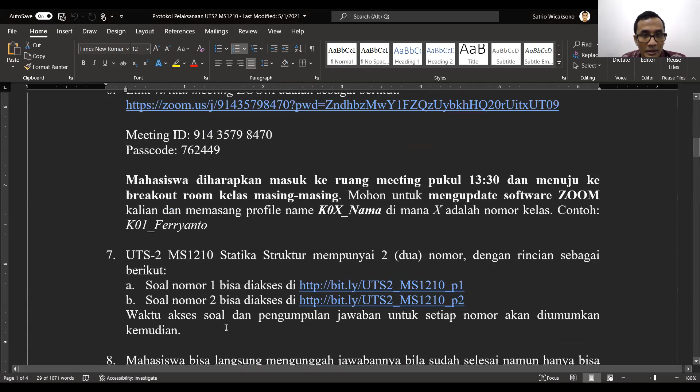Then the answer submission can be using MS Form or normally a Google Form. You are not allowed to leave your table while doing the exam. You are not allowed to use your cell phone or Excel as your calculator, so you have to bring your own calculator. You have to be on cam all the time. This is the Zoom meeting for the previous exam; it will be slightly different for this particular exam.

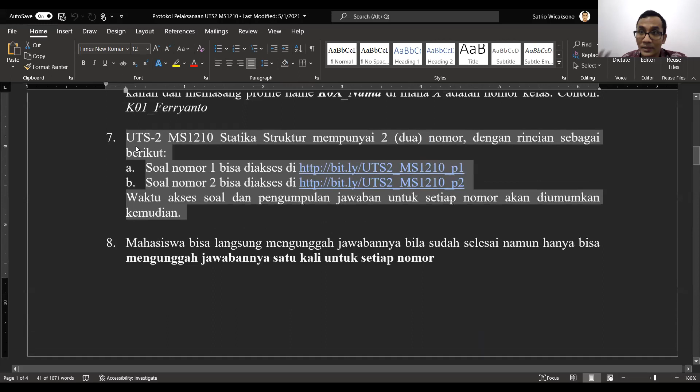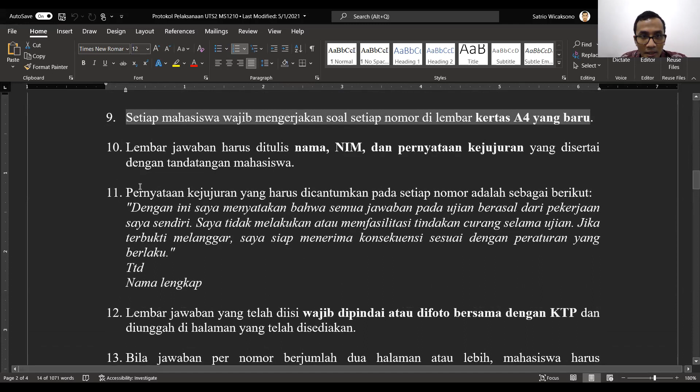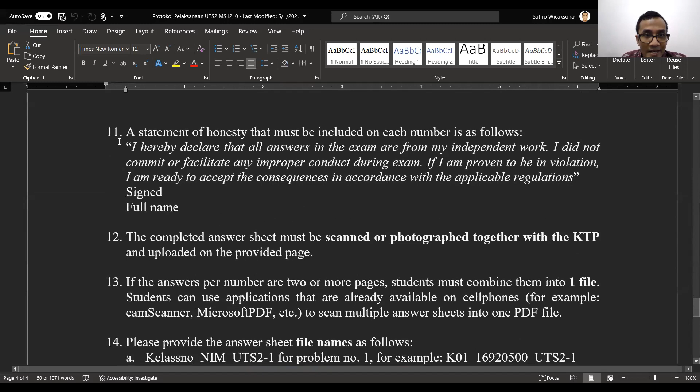You can only access the problem at the time of the exam. You have to use a new A4 paper, writing your name, your student ID number, and this one in Bahasa. But for those who prefer English, we have the procedure in Bahasa and in English, so you don't have to worry. Statement of honesty, you have to write like this. Also provide your ID, either your national ID or your student ID.

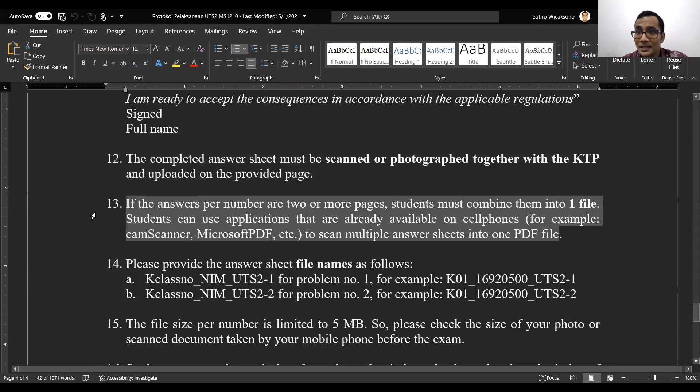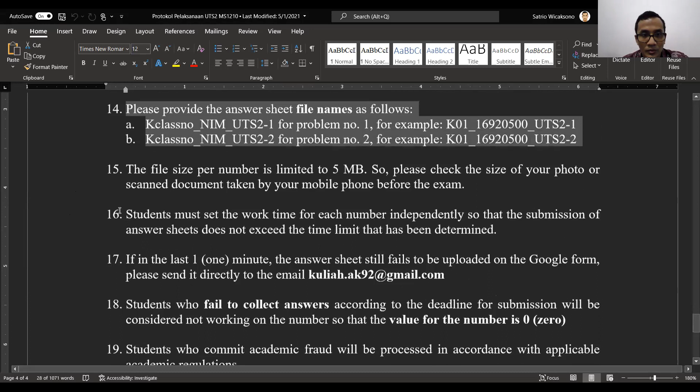This is how you're supposed to submit the answer. Most likely this guidance, this protocol, will be sent to you at least 2 hours before the exam so you can study it first. This is the naming of the file, so you have to name your file properly. There is a limit on the file size.

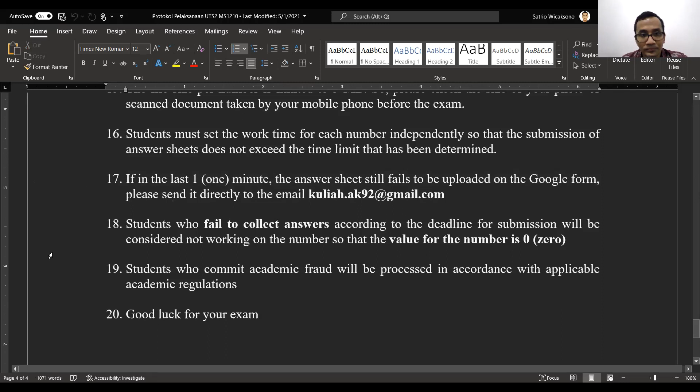If there is a problem when you upload your work, you don't have to worry; try to email directly to this. I'm not sure whether it will be the same for this particular exam, but we will provide an email for emergencies when you fail to upload to Google Form or MS Form. That is the protocol. There is a camera requirement, so it's better for you to prepare for it.

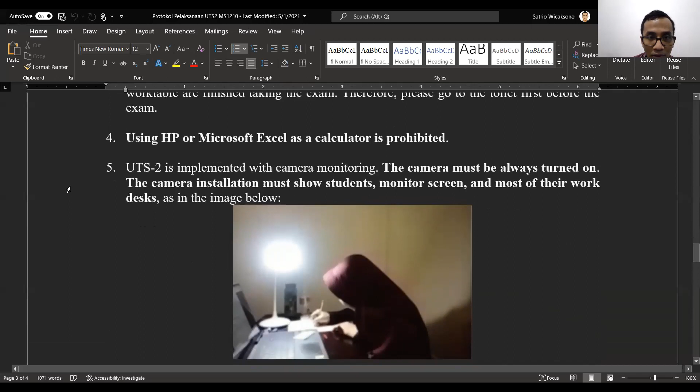Most of the time, you can use your laptop and your own cell phone camera. Use your cell phone camera so that the whole table is shown like this. Any other question about the exam?

I believe it's clear enough, right?

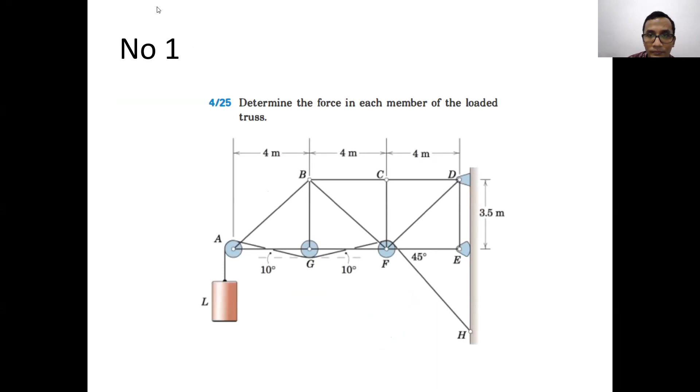But first, I want to check with you guys. Is there any problem with our homework? The latest homework. Number 1, number 2, number 3, number 4. Any one of you having a problem with your homework? Sir, I'd like to ask about number 3. Number 3. Okay, yep. So for points A and B, there are no reaction joints, right, sir? I just want to clarify.

Well, what do you mean by reaction joint? So there's no Bx or By and Ay and Ax, only 1.6 kilonewton each. So yes, correct. So basically at A and B, in this case, you can just simplify the problem into like this. So basically this is the simplification. The simplified case, actually, you can make it like this.

So basically at A and at B, you can just simplify it by giving a downward force of 1.6 kilonewton each. So like this, 1.6 kilonewton, 1.6 kilonewton. At G and at E, yes, of course, because it's a pin joint there will be Gx and Gy. And this one, there will be Ex and Ey, like that.

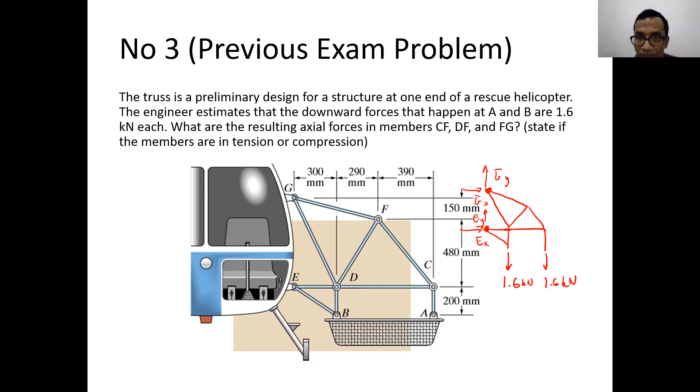The ones in question are CF, DF, and FG. This one. Okay. Basically, you can just use the joint method, or you can use the section method. But for this one, I believe the joint method will be much easier. Okay, because this one is a two-force member, right?

So basically, at C there will be 1.6 kilonewton. The member AC will be just under tension only because it's a two-force member, right? So I can just eliminate this and replace it with 1.6 kilonewton here. Because member AC is actually a two-force member, and we know the value of the force, 1.6 kilonewton. Okay, so basically this is the problem, and you can start solving it from joint C here.

After solving joint C, you can solve this and this. Okay, then after that you can solve joint F to solve for this and this. That's simple. Okay, Rafi? Okay, thank you, sir.

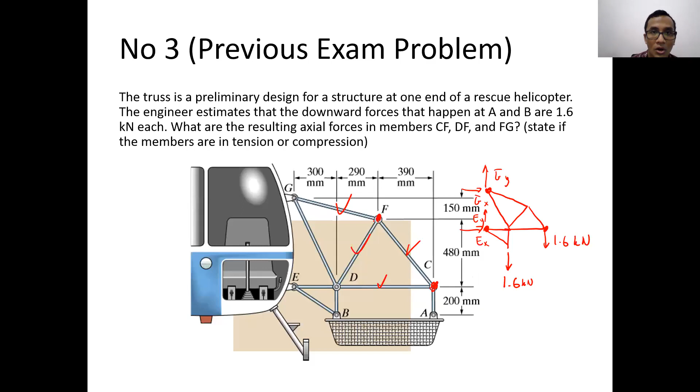Any other question about the homework? How about number 4 here? Is there any problem with this one? Although this one is a part of the statically indeterminate case, it's quite straightforward. Why is it straightforward? Because you can solve it using the joint method. You don't have to use the section method; you can solve it using the joint method.

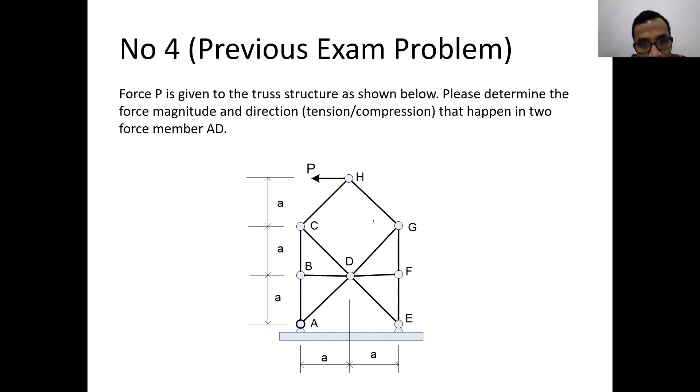And in this particular problem, from the beginning, you can see that some of the members are zero-force members. You can see clearly that BD and DF are zero-force members. BD is a zero-force member when you take a look at joint B, and DF is a zero-force member when you take a look at joint F. Okay, so this one is a zero-force member, zero-force member.

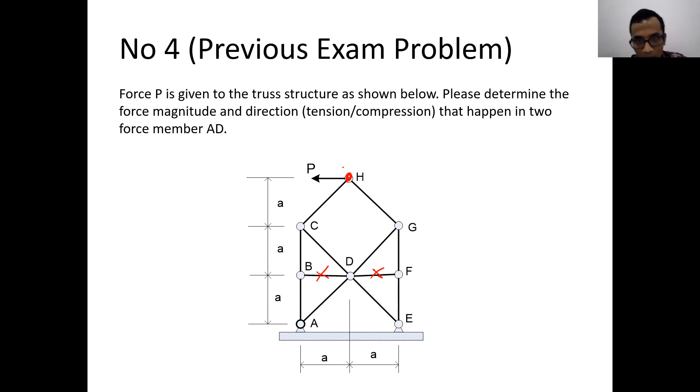So basically, you can start solving it at joint H, to solve for this and this. Then you can solve for joint C and joint G. Joint C to solve for this and this, joint G to solve for this and this. Okay, because DF and BD are 0, the value for AB will be the same as BC. So this one is known as well. F_AB will be the same as F_BC. The same for this one. The same for this one.

Okay, because DF is 0, the value of F_FG will be the same as F_EF, because those two members are collinear, and there is no other member there. Then after solving for that, you can solve this particular joint to solve for this and this, AD and DE, to answer the problem.

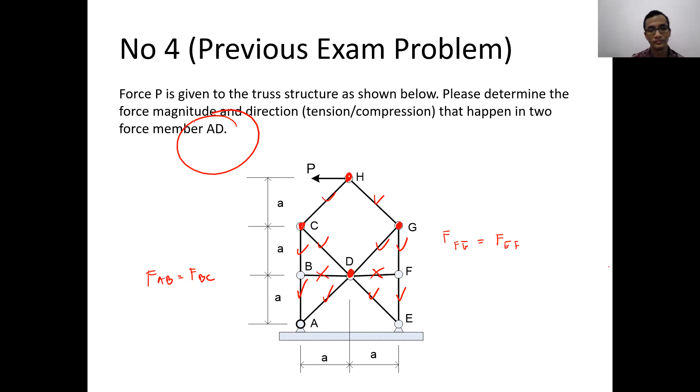Okay. Any other question about the homework? Zakia, do you have any problem with the homework, Zakia?

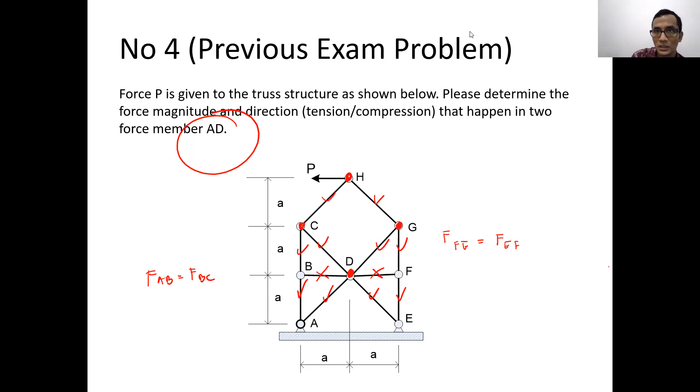If there is no more question, then I will just try to review all the things that will be included in the exam. Okay, I have prepared one slide. Yeah, this one. Stop share. Then share again. Yeah, I have prepared a slide. I have prepared a PPT for our midterm exam preparation. So actually, these are some of the previous exam problems.

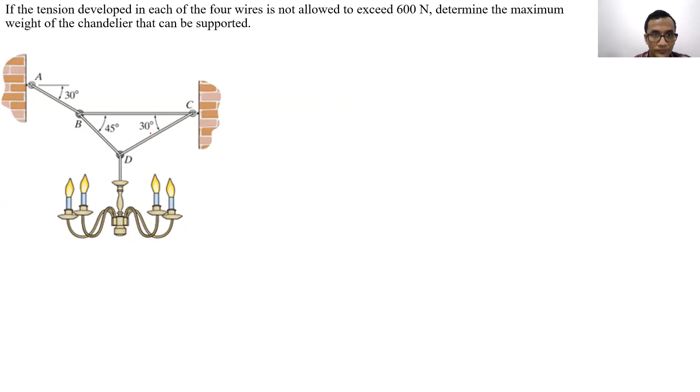So there are quite a lot of it. This one is the previous exam problem for our first midterm exam. Some of it, I believe I already gave to you guys as your homework. This one, I already gave to you as part of your homework. This one as well. Yes, I have given it to you as your homework. This one as well. Okay, this one, just now we have discussed. Okay, and this is some other midterm exam,

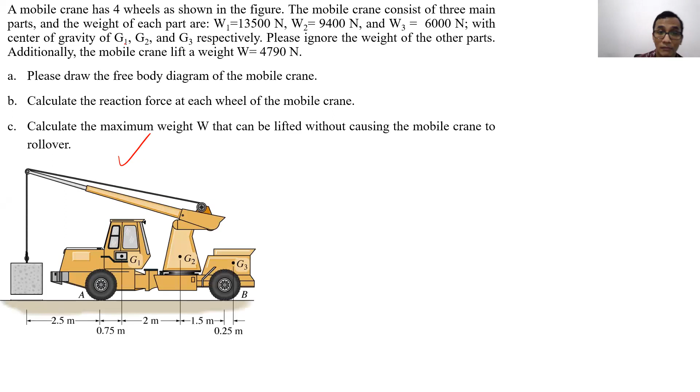previous midterm exam problem. So basically, when we take a look at this, there are three major topics that will be covered in this particular exam. The first one is related to the equilibrium. Sorry, not equilibrium. The first one is related to the resultant: force resultant, moment resultant, and how to move the force and moment like that. So that's most likely the first problem.

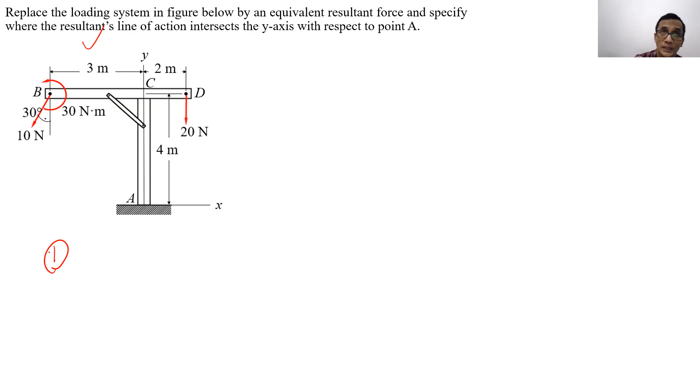Then, this is some of the example. Replace the loading system in the figure below by an equivalent resultant force and specify where the resultant line of action intersects with the y-axis with respect to point A. This is one problem example on that particular case. So it's about force, moment, resultant. Okay, this is another case.

And then the second thing that will be there in the exam will be about equilibrium. The equilibrium can be point equilibrium like this. Why I call this point equilibrium is because in order to solve this kind of problem, what you need to draw is a free body diagram at a point. So for this case, the one in question is the tension developed in the cord AC required for equilibrium. We know the mass of the lamp, 20 kilograms, multiplied by g.

Then we can go for the equilibrium at point D. At point D we have 20 kilograms multiplied by g. In the exam, please use 9.81 meters per second squared as your g. But here in the example, I will just use 10 as our g, 200 Newtons, and then we have the tension from DE, F_DE, and the tension from CD, F_CD. So this is our first equilibrium. We can solve this because it's point equilibrium.

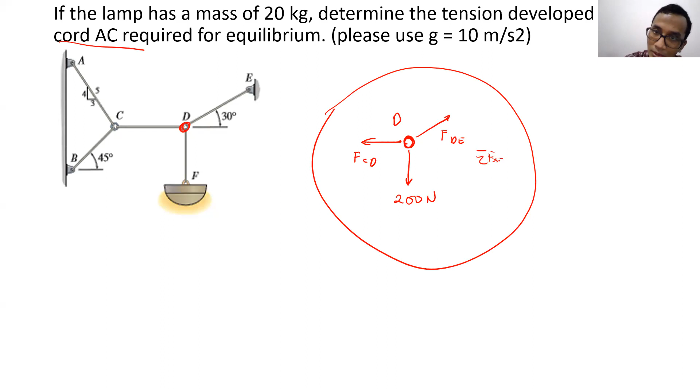That's the difference. If it's equilibrium at a point, we only have two equations: sigma Fx equal to 0 and sigma Fy equal to 0. Only those two, because there is no use of sigma moment; there is no moment arm. So by using these two equations, we can solve for F_DE and F_CD. That's the first point equilibrium. Then we can go to point C to solve the other point equilibrium.

At point C, we have F_CD as well, tension. Remember it's supposed to be action and reaction with the previous one. Then we have F_AC, tension as well, and we have F_BC, tension.

This is a point equilibrium as well, and we have two equations: sigma Fx equal to 0 and sigma Fy equal to 0. But remember, F_CD in the second free body diagram we already know from the first free body diagram. That's why we only need to solve for F_AC and F_BC. For this particular problem, is there any question? This is about equilibrium. Any question here?

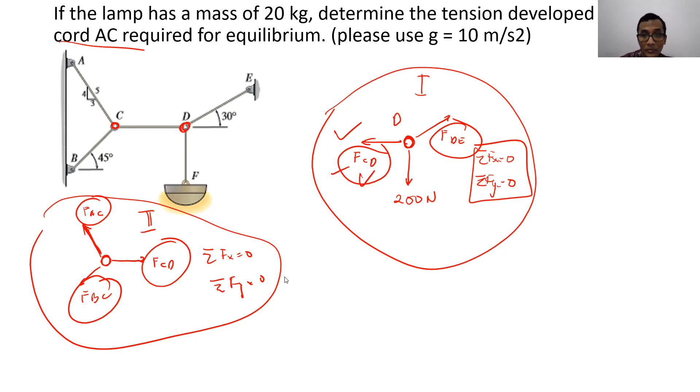So this is one of the problems that can appear in the exam, point equilibrium. And then this is another problem example. I'm not sure whether I have already discussed this or not. This is about equilibrium as well. Have I discussed this, or have I given it to you as homework? Hello? Yes, sir. I think we've discussed this before. Oh, we have discussed this before. Okay. So I will not be discussing this further.

But I just want to remind you. When we talk about free body diagrams, either an equilibrium case or truss case, if we have pulleys like this, and in the problem we don't have any information about the pulley size, it is safer for us, even if we have information about the pulley diameters, to just move the forces acting on the pulley to the joint.

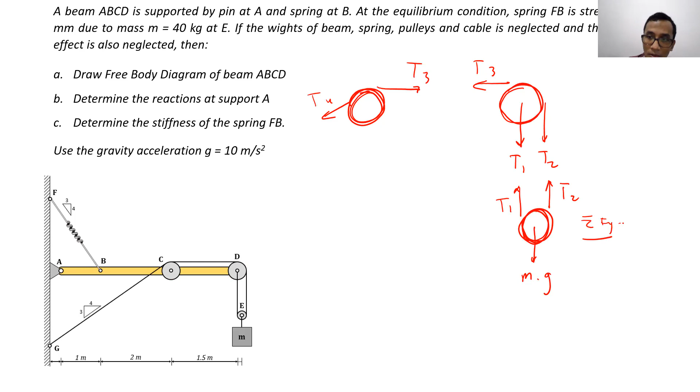And then from the small pulley, pulley E, here, we will have tension 2, tension 1, and mass multiplied by g. Using sigma Fy equal to 0 and sigma moment equal to 0 here, we will be able to solve for T1 and T2. And I missed a bit here because there is a joint D. We will have reaction forces Dx and Dy there.

So from this particular free body diagram, we have 3 unknowns because T1 and T2 are already known from the first free body diagram. In the second free body diagram, we have 3: T3, Dy, Dx need to be solved. And we have 3 equations as well: sigma Fx equal to 0, sigma Fy equal to 0, and sigma moment equal to 0, to solve for Dx and Dy.

Then after we solve for that, we can go here, the third free body diagram. I missed a bit as well. There's supposed to be Cx here and Cy here from the joint. This one is already known from the previous one. We have 3 unknowns. We will be able to solve it using sigma Fx equal to 0, sigma Fy equal to 0, and sigma moment equal to 0 to solve for Cx, Cy, and T4.

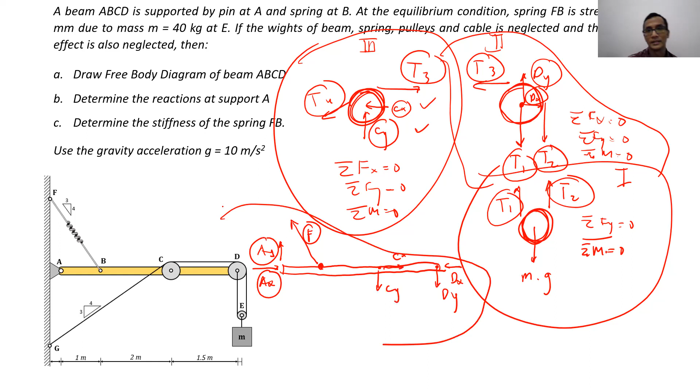So Cx is going to the right and Cy is going down. Here, Dx is going to the left and Dy is going down. Like that. Dx, Dy, Cx, Cy are already known before. So what we need to solve is just F, Ay, Ax. That's the thing. Whenever you solve an equilibrium case or truss case, when it has a pulley there, try to solve for the pulley first, find the reaction force, and move the reaction force to the free body diagram.

Any question about this particular case? This one is a two-dimensional equilibrium. Any question here?

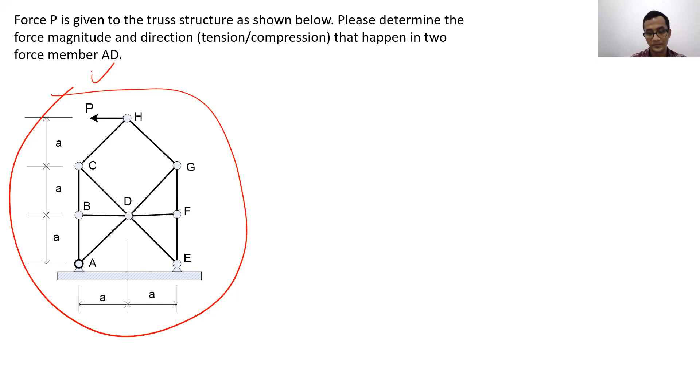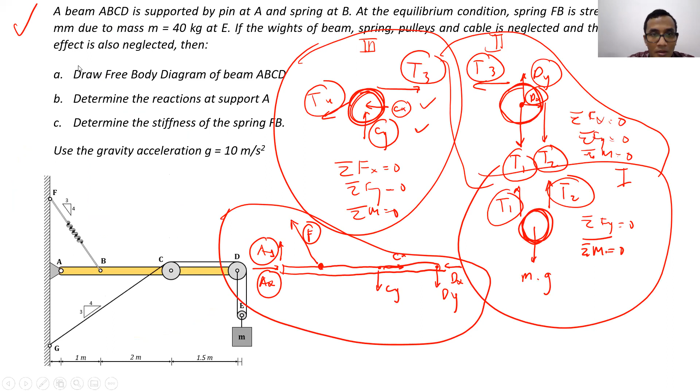Okay, this one is an example of the equilibrium. And this one is another one. This one is the first one, actually. It's part of the first topics that we have discussed. It's about resultant: force and moment resultant as well as the equivalent force and moment. I want to review a bit about this as well, because this one will be part of your exam as well. So we have this kind of problem.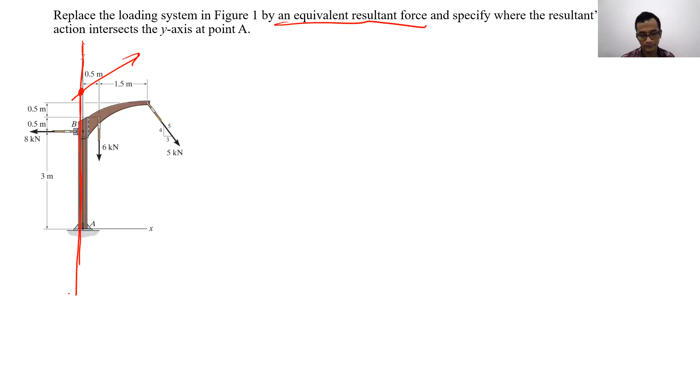Okay. For this particular problem, how should we solve this? I want to review the thing. Okay, Marcellus Mario. Yes. How do we solve this particular problem, Marcellus?

Hello? Move the force to point A. Move the force to point A. Yeah. All the forces, you mean. Hello, Mario? Mario? Yes. Move all the forces to point A. You mean it's like that? Okay. Hello, Mario? Yes.

So you mean this force 8, move it to point A, and by moving force 8 there will be force and moment at point A. Then this particular 6 kilonewton, we move it to point A. By doing so, there will be a force and moment as well. And the same, we can move this particular force to point A, and there will be force and moment as well.

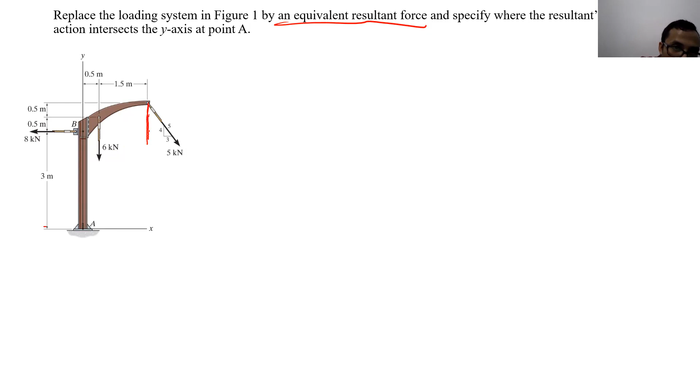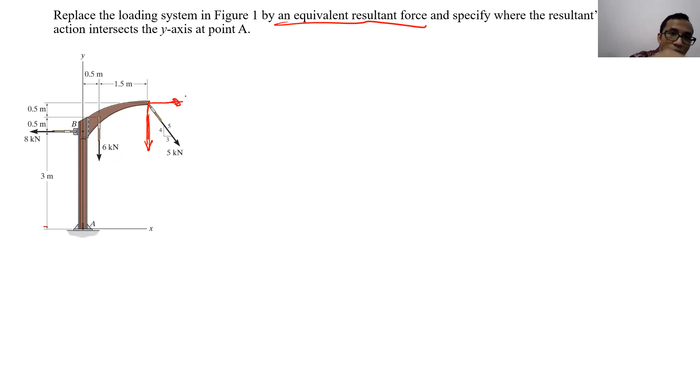Okay. But first, I believe it will be much simpler for us to divide the 5 kilonewton force here into two forces, because later the distance will be much easier for us to find. So here we have 3 kilonewton horizontal and 4 kilonewton vertical. So now we have 4 forces to be moved to point A.

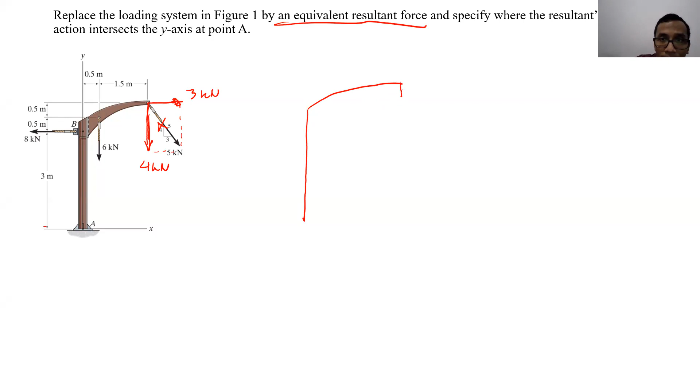So by moving 8 kilonewton to point A, what we will have later will be like this. 8 kilonewton, we move it to point A. By moving 8 kilonewton to point A, at the same time, we will produce moment as well. So there will be a counterclockwise moment here due to moving the force from point B to point A. And the distance there is 3 meters. So we will have 8 kilonewton multiplied by 3 meters, so 24 kilonewton meters.

Counterclockwise. Why counterclockwise? Because if we make point A the center of rotation, the moment due to force 8 kilonewton will be counterclockwise like this. Then we can move 6 kilonewton as well to point A. By moving 6 kilonewton to point A, there will be a clockwise moment, because A is now the center of rotation. 6 kilonewton multiplied by the perpendicular distance 0.5 meter, so 3 kilonewton meter clockwise.

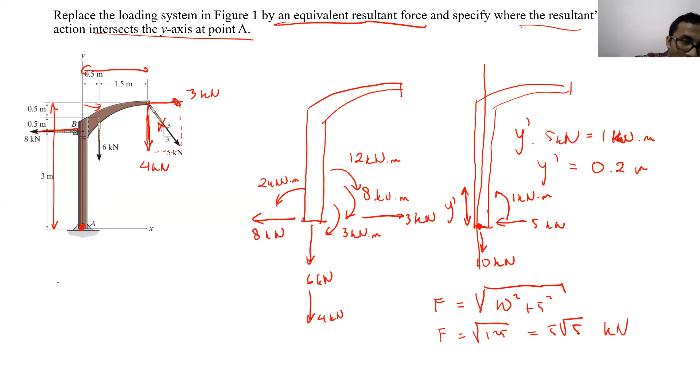So later, what we will have will be like this. From the bottom here, it will be 0.2 meter. And at this particular point, we will have the forces like this, 5 kilonewton and 10 kilonewton. Or we can just replace them with 5 square root of 5 kilonewton, this force, 5 square root of 5 kilonewton.

Okay, so this is about the force equivalent, resultant force, resultant moment, and the equivalent force. Okay, for this particular problem, is there any question?

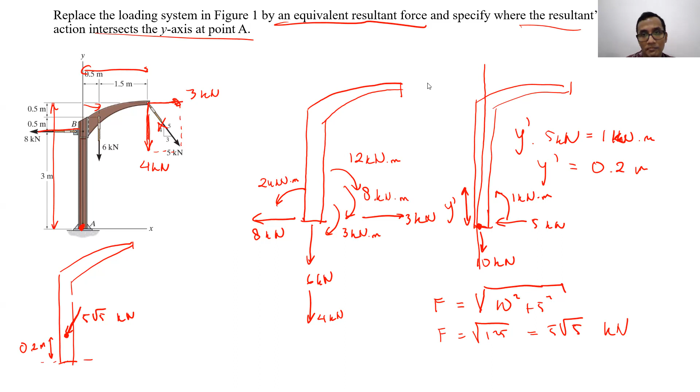Oke, kita lanjutkan ya. Let's continue. This is the equilibrium case we already discussed previously in the quiz problem, I believe. This one is our quiz problem. So basically, if we have a problem like this, there are several free body diagrams that we can take a look at. We have three free body diagrams. The first one is the beam.

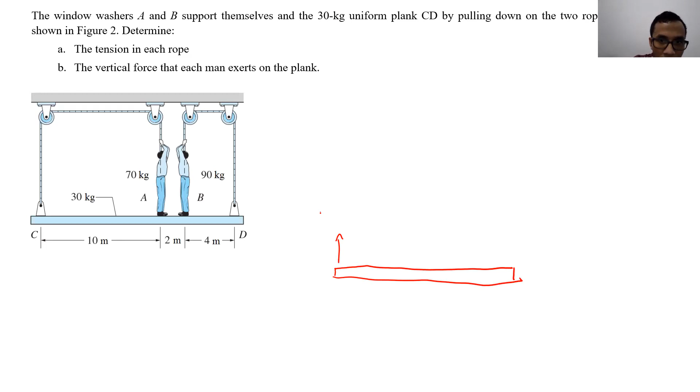In the beam, what we have is like this. There is a tension force here. We call it tension 1, and there is tension 2 here, and there is a person here. And there is a normal force from the person, and a normal force from the other person, AY and BY. That's the normal force from those two people to the beam.

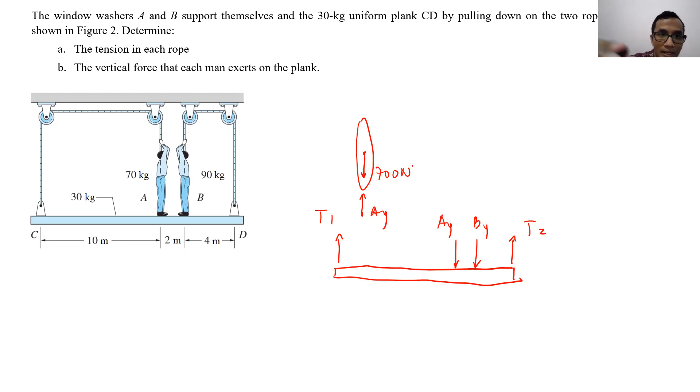Now let's take a look at person A. I will just draw it like this. This is person A. There will be AY there, the normal force from the beam to the person, so action and reaction with this one. Besides that we have the weight of the person, 70 kilogram multiplied by G. Please use 9.81 in your exam, but here I will just use 10, so 700 Newton, and then there will be a tension force there as well.

If we solve for all the pulleys here, the tension here will be the same as the tension here and here. So the tension on the beam on the left side, T1, will be the same as the tension on person A, T1.

Besides that, if we take a look at person B, there will be BY, the normal force, action and reaction with this one. That's why the value is the same, but the direction is opposite. And we have 90 kilogram multiplied by G. Please use 9.81, but I will use 10 here. Then T2, because the tension here will be the same as the tension here if we solve for the pulley.

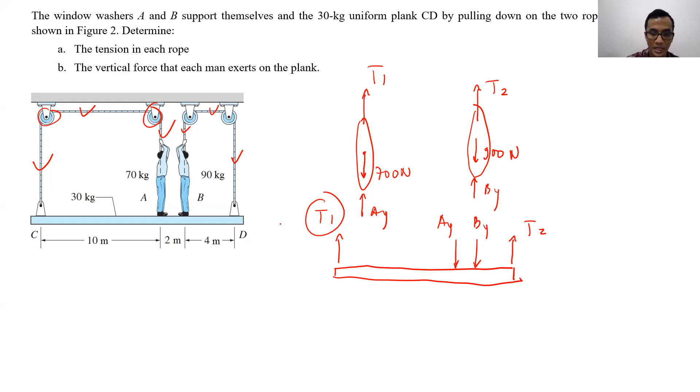So those are the free body diagrams apart from the free body diagram of the pulley. Those are the three free body diagrams: the first, the second, and the third. Let's take a look at how many unknowns we have. The unknowns are T1, AY, BY, T2, only 4 in total. And from those three free body diagrams, how many equations do we have?

From the first free body diagram, we have sigma Fy equal to 0 and sigma moment equal to 0, so two equations. From the second free body diagram, sigma Fy equal to 0. From the third, sigma Fy equal to 0. So in total we have 4 equations, so we can solve it. First we solve these two to find the relation between AY and T1, and BY and T2.

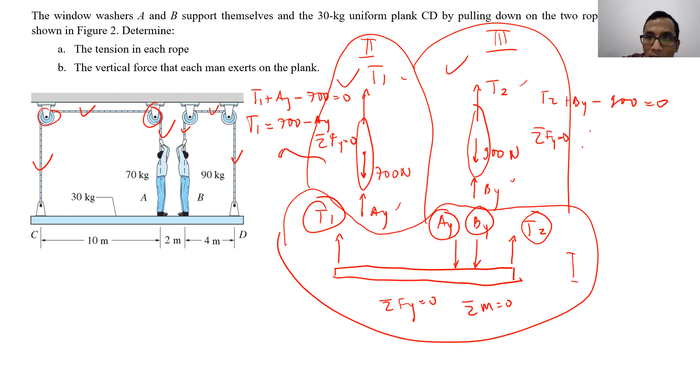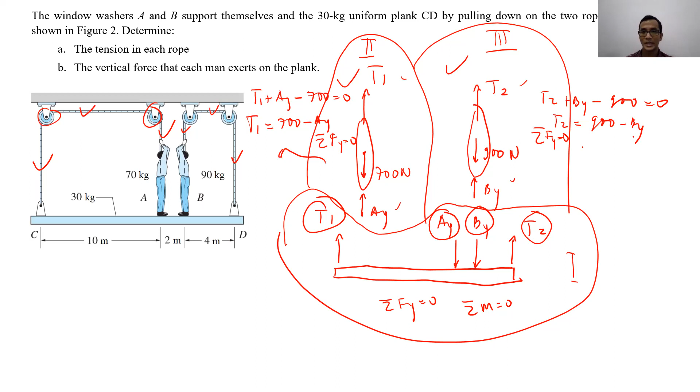From this, we get T1 plus AY minus 700 is equal to 0, so T1 is equal to 700 minus AY. The same here, using sigma F equals 0: T2 plus BY minus 900 is equal to 0, so T2 equals 900 minus BY. Then we can use those two in the first free body diagram.

Okay, to replace for all T1 and T2. Using sigma Fy equal to 0 from the first free body diagram, what we will have is T1 plus T2 minus AY minus BY equal to 0. So T1 and T2 here, we can replace with this and this.

And the second equation, using sigma moment equal to 0, if I put it at C, sigma moment at C equal to 0, then I will have AY multiplied by 10 plus BY multiplied by 12 minus T2 multiplied by 16 equal to 0. The same, you can replace T2 here with this one.

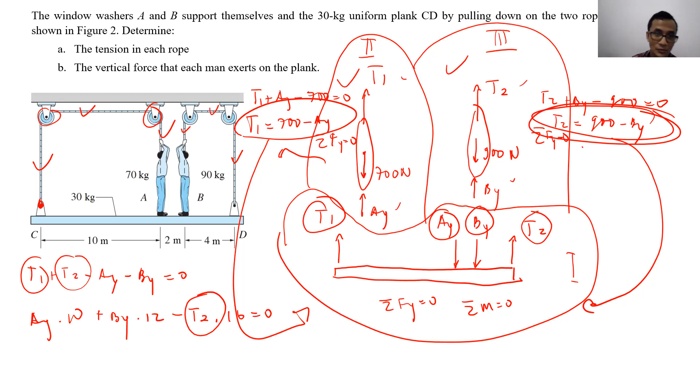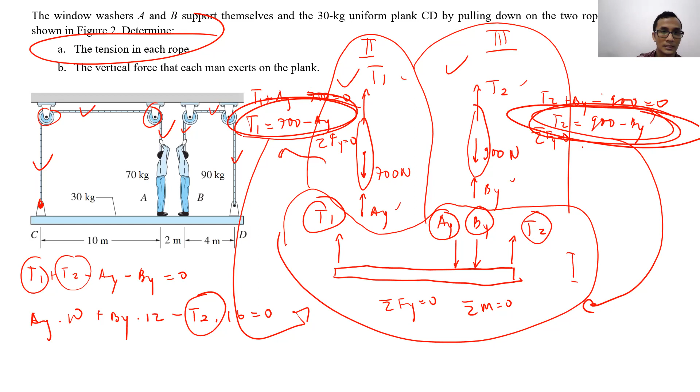So at the end, you will have two equations which only have AY and BY. That's why you can solve for AY and BY to solve the first question. Sorry, by solving AY and BY, you actually solve B first. And then, after you solve for AY and BY, you can solve for T1 and T2 using these two equations to solve for question A. That's the thing. Okay.

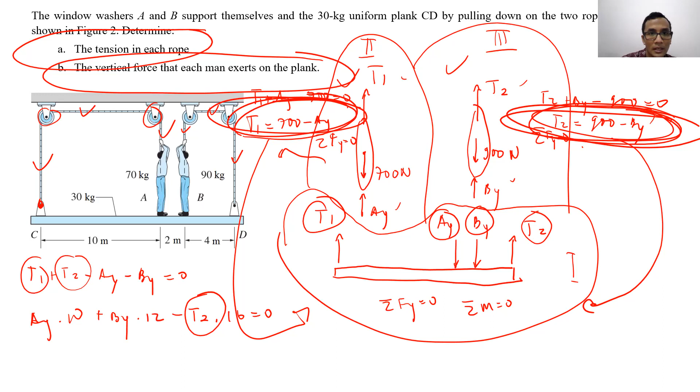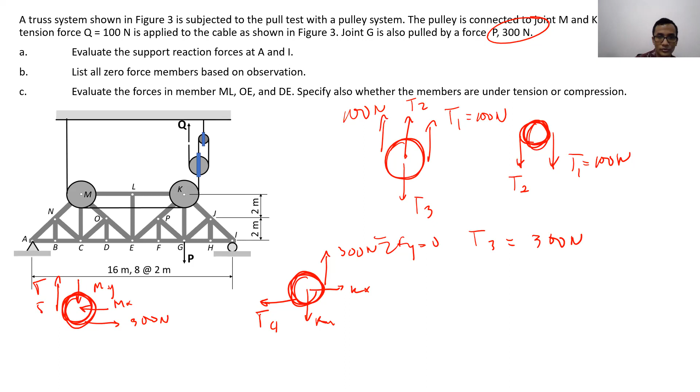Then we can solve for M. It will be 300 Newton here. This one is T4, T5. T5 there will be 300 Newton as well. And besides that, we will have Mx and My. After solving that, you will know that Mx and My will be 300 Newtons each. So at the end, you can solve the free body diagram of the truss. There will be several forces there.

And the first thing that you're supposed to do is to evaluate the zero force members. There are several zero force members here. You can try to use your knowledge on zero force members, but based on the first analysis, I know that this one is a zero force member, this one is a zero force member, and this one is a zero force member. Because those four are zero force members, this will become a zero force member as well.

Sorry, that one is not. This one will become a zero force member as well. Besides that, this one is a zero force member. And because these 4 are zero force members, this one will become a zero force member as well.

Okay, because this 4 is a zero force member, this one will become a zero force member as well. So you can see, right? There are a lot of zero force members over there. So basically, the problem can be simplified into this. Now it becomes very simple. This one is not a zero force member because there is a P here. But MC is a zero force member because there is no external force there. Okay.

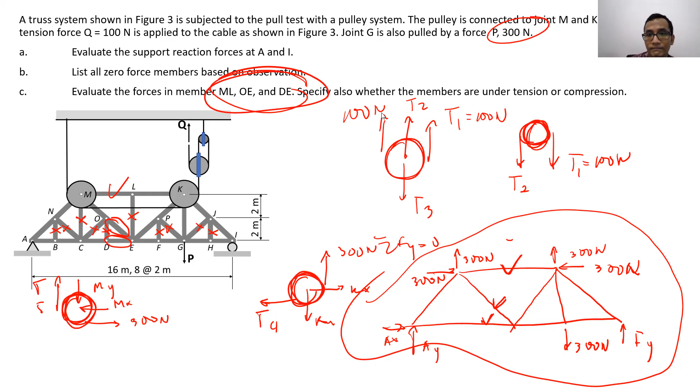Which part of it don't you understand, Adam? I think I understand. Just still trying to get the other part a little bit. Okay. Later, it's better for you to review it using the video. Okay. I think I will just continue.

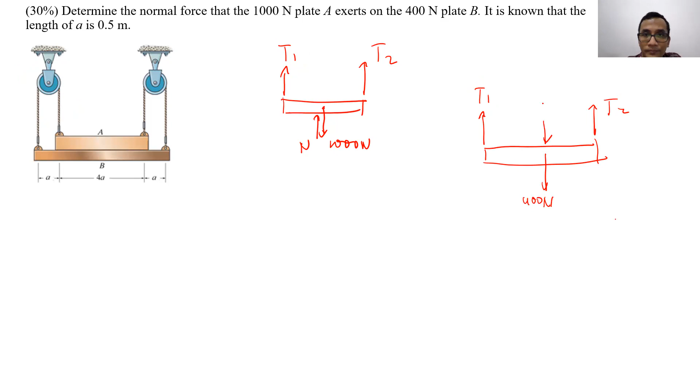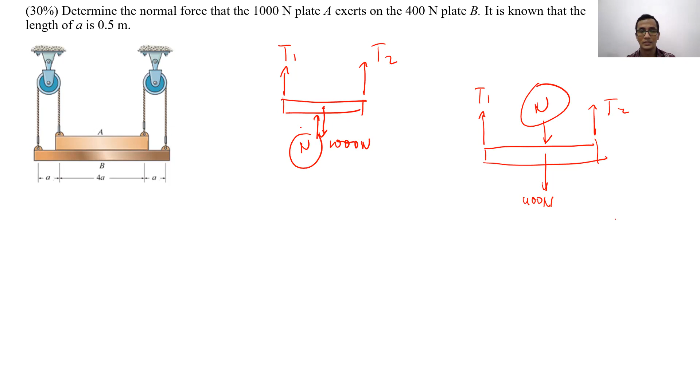What else? There will be 400 Newton going downwards. And then there will be a normal force going downwards as well, because A is pushing B downwards, but B is pushing A upwards. That's the action and reaction. That's why the normal force here is going down, and this one is going up. The one in question is N.

So using the first free body diagram, we have sigma Fy equal to 0 and sigma moment equal to 0. Using sigma moment equal to 0, we will have T1 equal to T2. And then using sigma Fy equal to 0, we will have N minus 1000 plus T1 plus T2, but T1 is the same as T2, so N minus 1000 plus 2T1 equal to 0. Then we can use this for the second free body diagram.

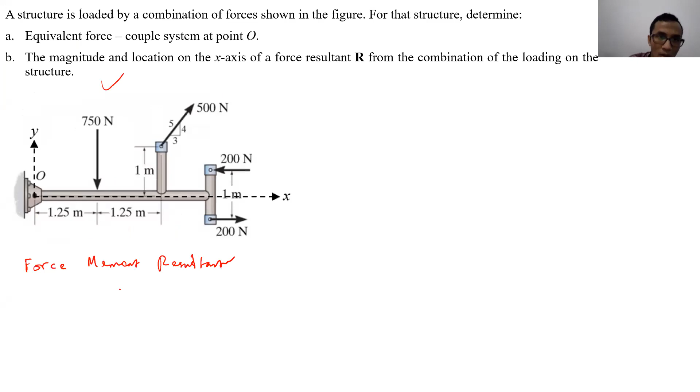The same, we can use sigma moment equal to 0, and the result is T1 equal to T2 as well. And then using sigma Fy equal to 0, we will have 2T1 minus N minus 400 Newton equal to 0. We have two equations with T1 and N, the normal force, so we can solve for T1 and we can solve for N. The other problem I already gave to you guys as homework. Any other question about this?

If not, then I will discuss a little bit about the frame. Frame will not be part of your exam. It will not be part of your first midterm exam. I think in order to make it easier, I will divide the recording into two.